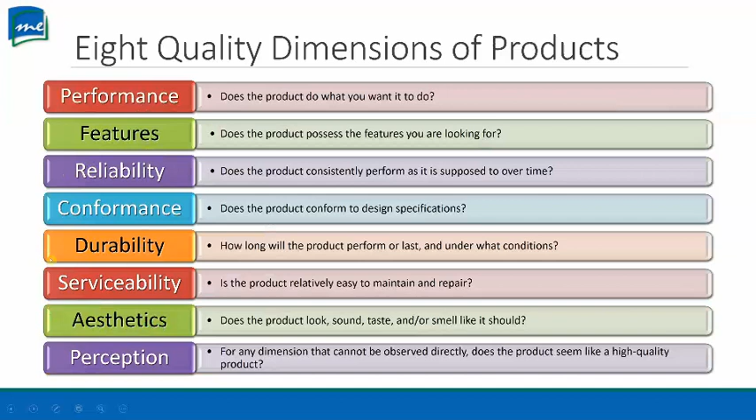In sharp contrast, in order for you to experience reliability, durability, and serviceability, all of these assume that you've already purchased a product and have been using it. Okay. So fast forward a little bit, cost of quality really comes down to either the production process or failure. So process costs versus outcome costs. Okay. So if you think about a production line, you can try to prevent defects by inspecting supplies. You can appraise your products to prevent costs from escalating.

But when you detect a product that's failing, you tend to need to scrap the product to be reworked. Some of them might even be permanently wasted. For those of you who ever purchase something from Amazon, do yourself a favor and just search for the term manufacturing defect. Amazon has a massive number of products that are sold by manufacturers because they're brand new products, but they're sold at a huge discount because there's some sort of manufacturing defect that may not necessarily negatively influence the utility of the product itself, but nonetheless it just doesn't look very good.

And of course, external failure is the costliest of all, simply because by then your customers were impacted by the external failure. One of the most widely spread and severe external failures in recent times is the Takata airbag failure. By the time customers experienced Takata airbag failures, there were fatalities. As the airbag expanded upon impact, the chemicals used by Takata in their airbag actually sent pieces of metal through the airbag, the shrapnel, and killed the drivers. The shrapnel became deeply embedded in their heads, so that a driver feasibly could have survived that wreck, but was killed by the airbag. So that is one of the most extreme examples of external failure.

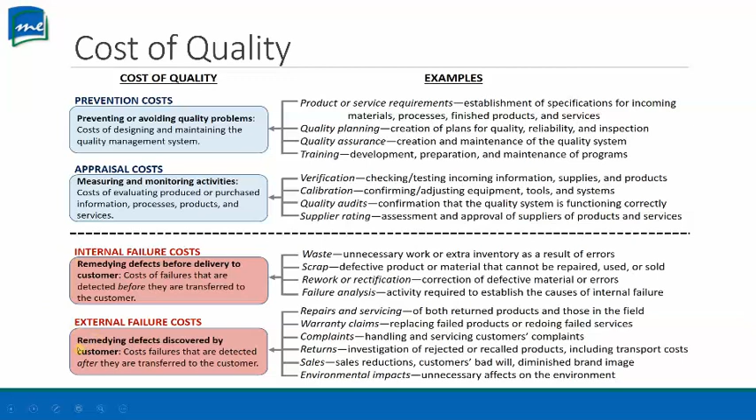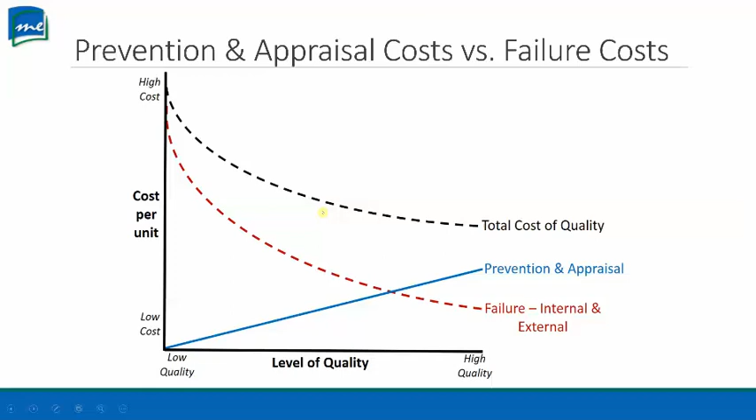And so most companies, of course, they can't 100% ascertain where they're operating along this curve. Some spend a little bit too much on cost of quality, but then they tend to also have marketing dollars to back it up, along with comparable price premiums. But for some companies, they may think that they're somewhere close when they're really pretty far back. The 90s General Motors is one example. When Chrysler briefly merged with Daimler, they actually traveled substantially backwards on cost of quality.

So how do you actually improve quality? We have something called statistical variance reduction. Most of you probably have heard of Six Sigma, or some of you may have even heard Lean Six Sigma. But what it really talks about is we're trying to limit the deviation in the products that we produce to be within 6 standard deviations of what we intend to produce. And so let's say that a product is designed to be within about an inch and a half. We want this little spread between an inch to an inch and a half, this half an inch spread, we want it to be able to cover 6 standard deviations of what we target to be about 1 1/4 inch.

Now, when it comes to standard deviation, or the variance of our production process, we tend to be able to attribute it into common cause versus special cause. Now, with common cause variation, these are the things that are probably beyond our control, unless we do some wholesale system upgrade, brand new machines. So common cause variations tend to stay. Special cause variations is where we spend most of our time and energy on, because these are the causes that we can identify, that we can address, and that we can reduce in terms of the overall variation.

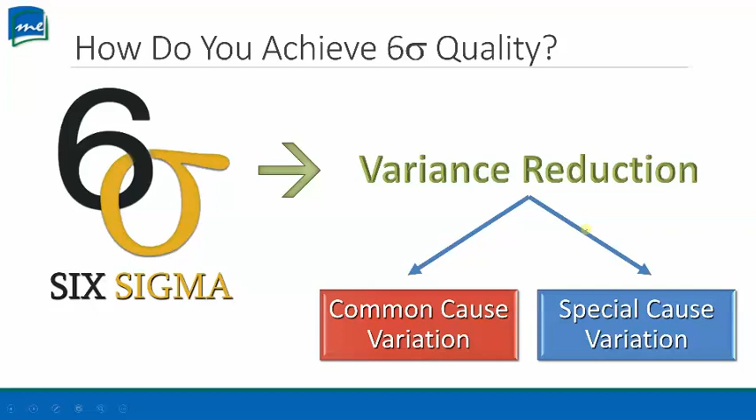But how do we actually know if we have Six Sigma quality? It begins with something called process capability. So following up with what I said earlier with the spread example, the way that a company typically does things is that if they want to measure their quality, they would conduct a pilot test. Take a random, the keyword here being random sample, right? Going back to your basic statistics, normal distribution relies on random sampling. If you systematically sample, then you may introduce systematic bias here. So run a pilot test with random sample under actual operating conditions.

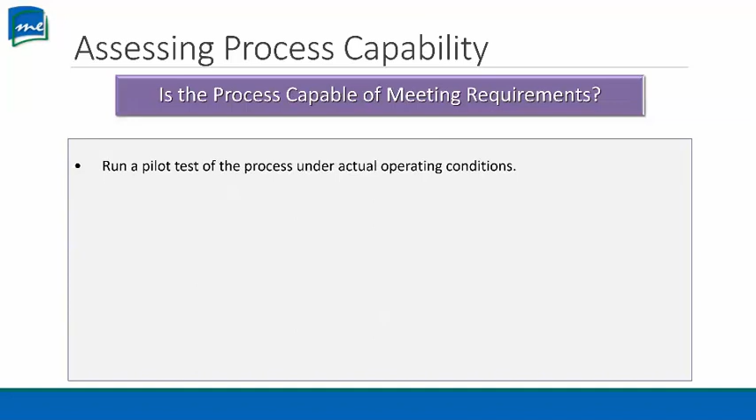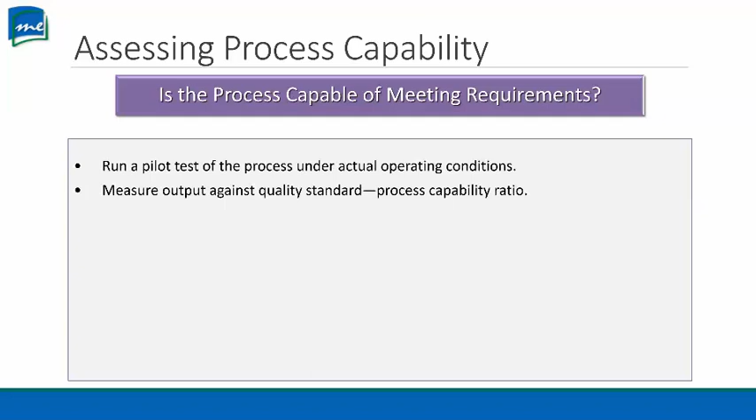So if you're a pizza delivery company, you would randomly survey customers about their service experience. If you're a retailer, you would randomly have on a receipt a survey link. Hopefully your customer will take the survey, right? So you run the pilot test under actual operating condition, and then you measure the output against your quality standard. This is what's called process capability ratio. Now, quality standards are generally established by company engineers or process engineers who design the product or service process. And what it usually comprises is that there's some upper specification limit and some lower specification limit.

So if you have ever assembled furniture, you can consider this to be the width of that hole where a screw is supposed to go in. Beyond a certain width, the screw would not fit at all. It would just strip itself easily. But then, if you have a hole that is much smaller than a specification, then there comes a point when the screw would not even go in. And so really, anything in between the upper and lower specification limit will be considered acceptable. And then the standard deviation will be something that you statistically measure based on your random sample.

And so the easy way to interpret this, the absolute value of USL minus LSL divided by 6 sample standard deviations, is that your process capability ratio is equal to what is considered to be acceptable divided by the actual process variation. So the process capability ratio is the acceptable deviation versus the actual deviation, hence 6 sigma. So if you have a process capability less than or equal to 1, that means that your actual deviation is greater than the acceptable deviation, as in it is not acceptable at this point. You would have a process capability ratio of less than 1. On the other hand, if you have a highly capable process, then the ratio will be greater than 1.

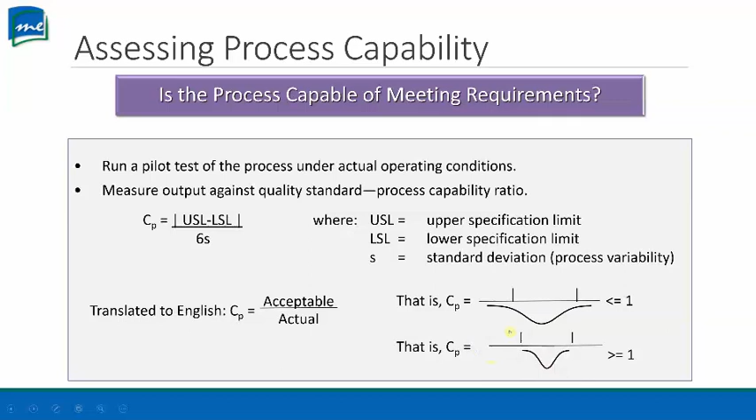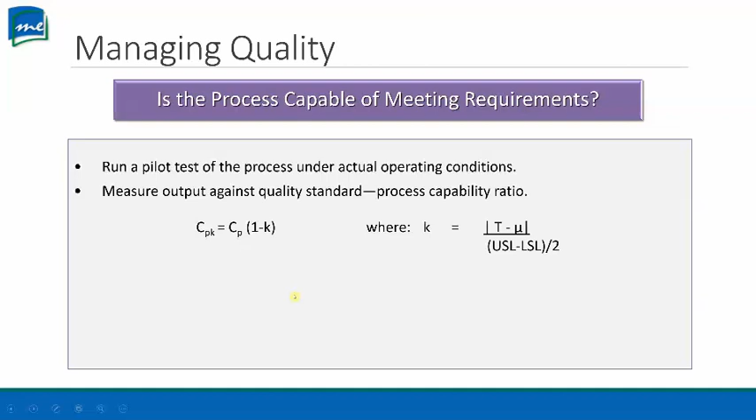On the other hand, this is your sample average. You take a random sample, you take the average of that sample. And then you divide this, basically the gap between what you intended to produce on average versus what you actually produced on average, by basically how much you are allowed to go in either direction. This is the intended gap. So again, it's actual gap divided by design gap.

So your CPK here, after calculating the process capability ratio from the previous slide, multiplied by 1 minus K, would give you an assessment of whether there's systematic bias. So think about this for a second. If you were manufacturing on average exactly what you intended to make, then the numerator here will be 0, and 0 divided by anything would be 0, and 1 minus 0 would be 1, and so your 6 sigma quality would be 1.

But on the other hand, if at any time you have a small gap here, if you have T minus mu to be different, that you're producing something that is not exactly what you intended to produce, this term here, 1 minus K, you can think of it as almost a discount for CP. That yes, based on standard deviation, your process capability ratio looks good, but then it must be discounted by the fact that you are not producing exactly up to specification, and that you're systematically biasing.

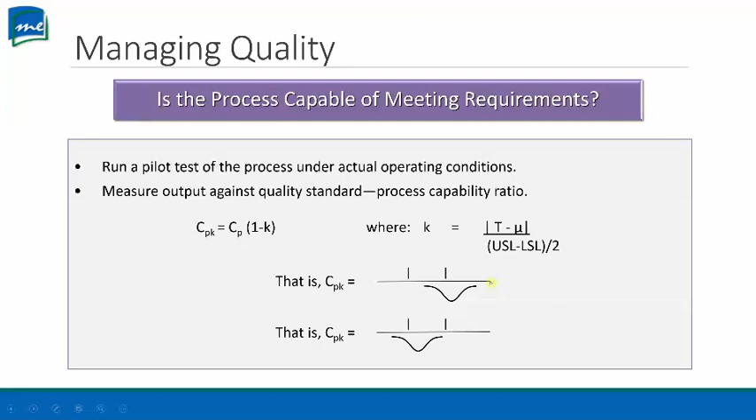And so as a result, your full capability index, CPK stands for process capability index, accounts for both the deviation-based measure and the mean deviation. Okay, so let's take a quick look at the example here. Suppose that the design engineering team set the specifications to be 10 inches with acceptable tolerances of plus minus 0.05 of an inch. So you take a random sample, and the average turns out to be 9.99 inches with a standard deviation of 0.015.

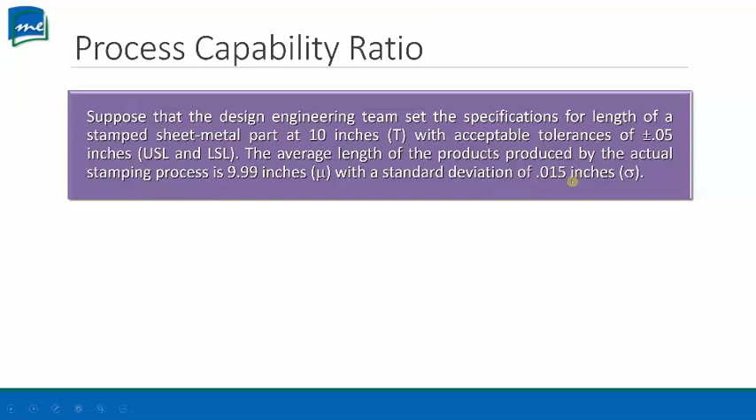At this point, I would advise you to pause the video and work on this problem briefly, make an attempt before we proceed. So, assuming that you did pause and try to calculate, the calculations for CP and CPK are as below. With the process capability ratio itself, you have the upper and lower specification limits, plus and minus 0.05 of an inch. It will be 10.05 minus 9.95, the acceptable deviation, divided by 6 times 0.015, 0.015 being the standard deviation. And so you have 0.1 divided by 0.09.

So without considering 9.99, without considering the mean, your process looks to be capable of 6 sigma quality. But once you throw the K in, that's your actual mean adjustment, you recognize that your production process biases a little bit on the low end, 9.99. So you do 10, your intended target, minus 9.99, divided by what you designed the process to make. So you get 0.01 divided by 0.05, or 0.2.

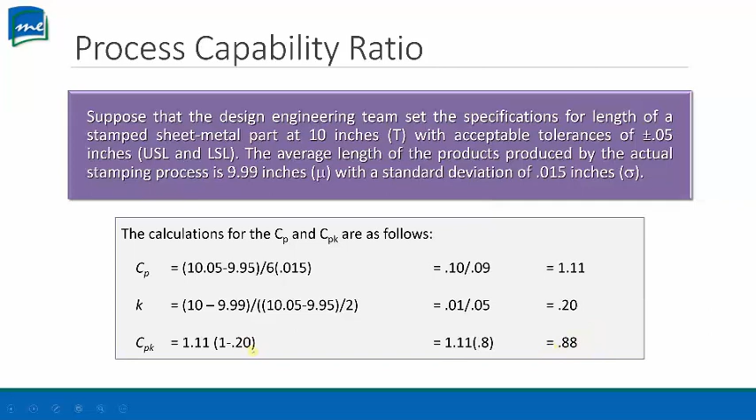And so what can you do about this? This is where we go to a control chart. What most companies do is they recognize the target, they recognize there's inherent variability, and then they need to develop a certain level of confidence that what they statistically observed was not just a blip on a radar that doesn't warrant any action. So a control chart tries to keep track of quality performance over time, and in this instance, M&M targets for each bag to contain 24% blue M&Ms, but the actual outcome could be 24.3 or 26, and everything in between.

And so what companies want to do is they want to determine what is their 99.74% confidence, or 3 sigma confidence, in terms of their overall process capability. So what a quality control chart basically does is it wants to look at performance over time, where M&M targets 24% on average over time, but they set their confidence limit to be within 3 sigma standard deviation, and so they would accept up to 26.3% as still within reason, and then 21.7% as being within reason.

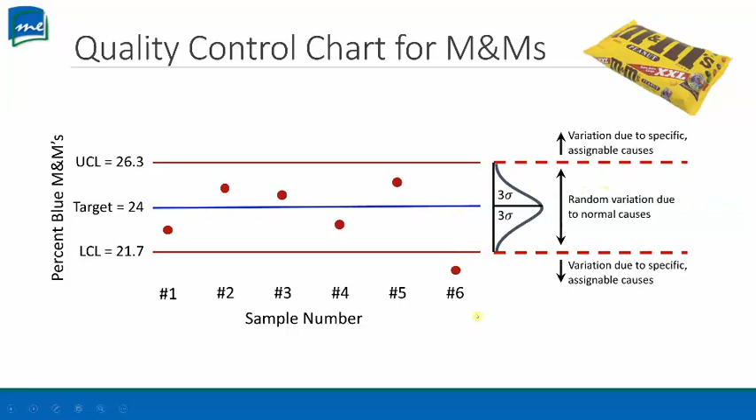So how do you know if your process is out of control? Well, you look for certain patterns. As I illustrated on an earlier slide, a single point outside the control limits would be considered problematic. But then some other patterns, 2 out of 3 successive points on the same side, so that indicates a potential systematic bias over the period of time. 4 out of 5 successive points are on the same side and farther than 1 standard deviation from it.

Again, potential issues. A run of 8 in a row, so you're talking about a trend. Again, you want to take a look at what's happening. And then any consistent or persistent patterns, or any patterns that repeat, that might warrant your attention.

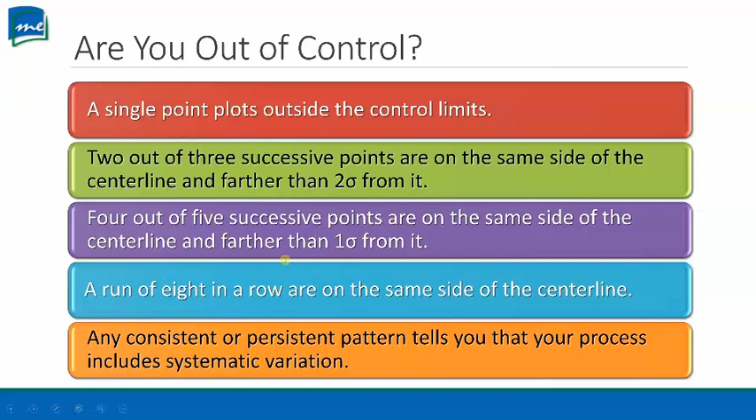So what can you actually do? So quality management is not just statistical, but a lot of it is also managerial. Some of it follows Deming's plan, do, check, act, improvement cycle. We covered this briefly already in the continuous improvement in process management. But this is a systematic way for a company to know what they're doing, to verify that they are doing what they intend to do, and to formally address when things are not going the way they want it to.

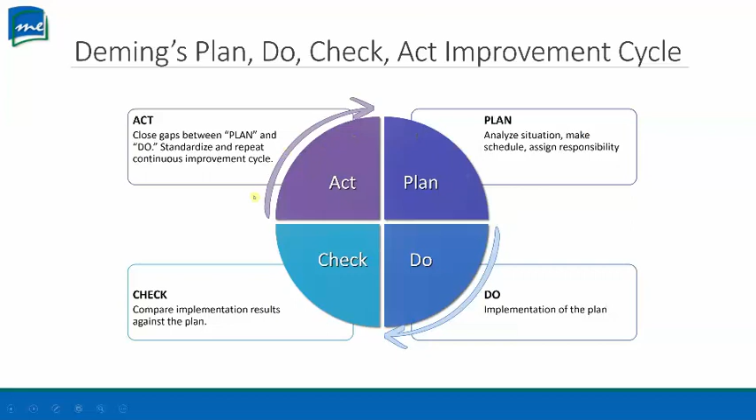But beyond this simple plan, there are some other tools. There's the cause and effect diagram. Some people call it the fishbone diagram for obvious reasons. What this diagram excels at is for you to be able to identify major factors that would influence a desired outcome. In this case, you notice a surge in defective parts. So what are the major factors that would contribute? You identify the major factors, and then you start to identify sub-factors.

Why can people result in defective parts? Maybe they're not trained well, maybe they're tired. Or perhaps the machines are at fault. Maybe poor maintenance due to poor training. Or perhaps it's the material environment. The point with this is it's a systematic way for you to identify all the major and sub factors that would contribute to defective parts, and then as you look at each category, you might be able to group different causes of defect with various remedial measures.

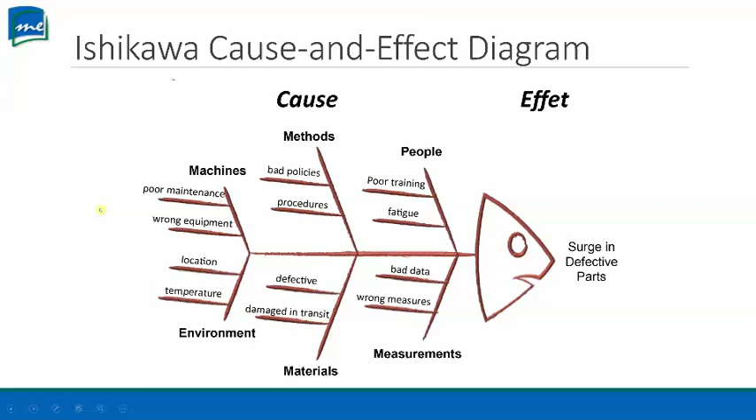So, for instance, perhaps if you improve your employee training program, you can both improve machine maintenance and improve people effectiveness, and maybe because people are doing their jobs in a smarter, better way, just spending less time, so they'd be less tired, or perhaps machines are not being maintained well because of bad data, or they're paying attention to the wrong measures. The point is, when you formally put down all the different factors, this is how you can actually understand how to go about improving a process.

And so finally, what quality management is intended to convey to you is that with quality management, there is no trade-off between cost versus revenue, but instead, quality management is intended to simultaneously reduce cost and increase your revenue. Reducing cost because of minimized waste, increasing revenue because of greater customer loyalty. Toyota certainly embraced quality management as a way to become one of the world's most dominant automakers. Same with Honda. In fact, this is the reason why Japanese vehicles are synonymous with dependability and reliability.